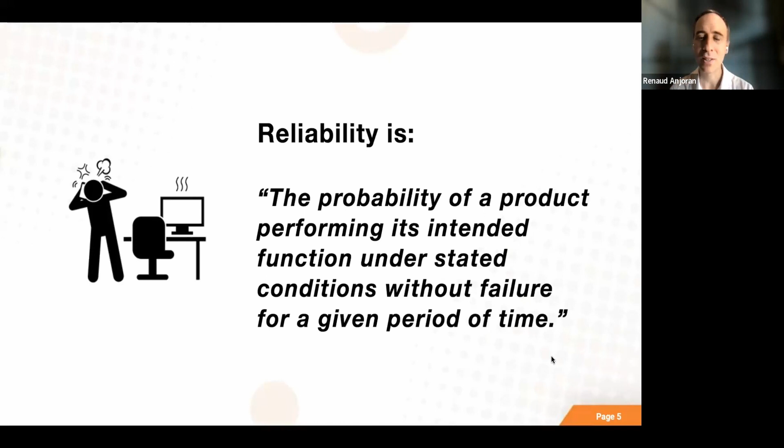Exactly. Okay, so with that out of the way, a lot of people confuse design issues and manufacturing issues, like reliability and quality. So is it fair to say that reliability is really built into the product at the design stage, while product quality really comes from good manufacturing processes?

Yeah, that's correct. Basically, reliability is part of the design, meaning that if the design is not reliable, then basically the whole product is not reliable, regardless of manufacturing. However, when it comes to manufacturing, if there are issues that relate to manufacturing only, then we're talking about manufacturing quality issues. We're not necessarily talking about a design issue.

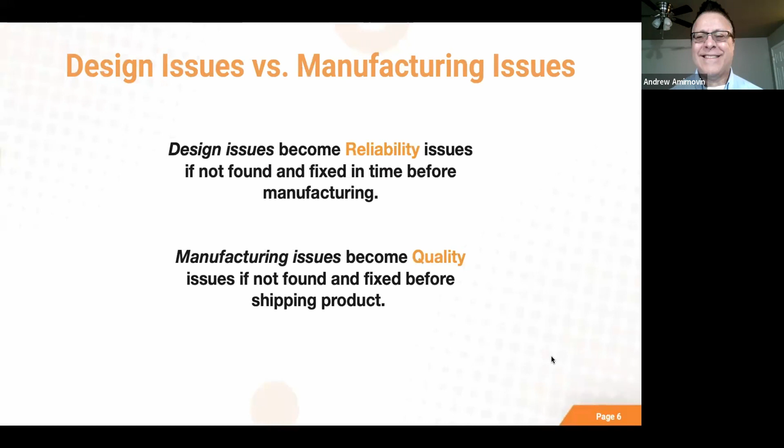Right, of course, it's a bit more complicated than that. What, can manufacturing issues still creep into the product and make it poorly reliable? Maybe, especially right, 1, 2, 3 months after delivery, the early failures—a lot of them are due to manufacturing quality. But this is a nice way of looking at it.

So why is it important to pay more attention to quality pre-launch to save cost post-launch? There's a direct impact on lower cost once the product is on the market. So why is that?

Well, if you are trying to make a reliable product, then you wouldn't have all these issues that we have in the red section. For example, you'll end up having at the least additional inspection issues, trying to figure out how to fix these issues. And then, of course, rework and repair problems, maybe even massive returns and product recalls that need to be dealt with. Loss of sales and revenue impact.

Of course, tarnished brand and marketing image that would definitely hurt. Customer complaints and investigations, high warranty costs. We're talking perhaps even need for excess inventory to cover all those losses and issues. And then at the end of the day, we're talking legal issues, litigations, and lawyer fees. All of these are considered to be some sort of cost, and if you add them up, it'll be a huge cost.

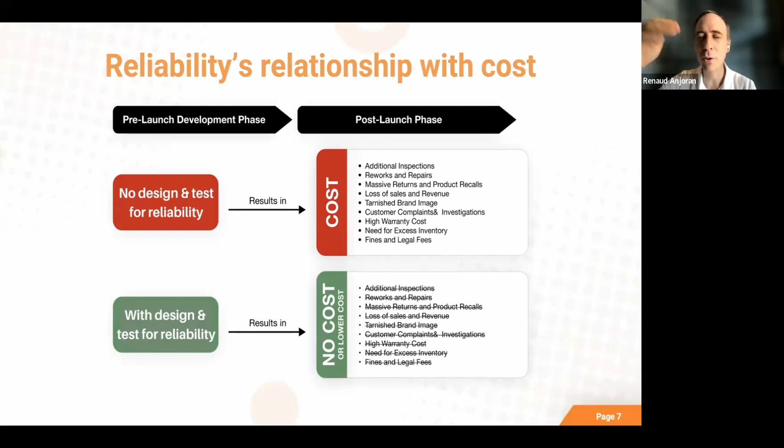So good design for reliability and good testing to catch the issues will prevent most of these costs. That's really why we're doing this webinar. And the higher the volume of production and sale of the product, or the higher the price of the product, the more this is important.

Yep, that's right. Let's look just very quickly at two very dramatic examples of catastrophic reliability failures that cost billions of dollars. One was the Galaxy Note from Samsung a few years ago. And this was really a reliability issue, due to the design of the batteries and the packing around the batteries.

Yeah, it's true. Imagine that just one battery caused so much issues for a huge company like Samsung. If any other company had this problem, they'd be out of business for sure. Maybe Apple or Google might have survived also, but this is not for smaller companies. Correct. Another one was the 737 MAX that has been grounded for years and years, but basically this also is a reliability issue.

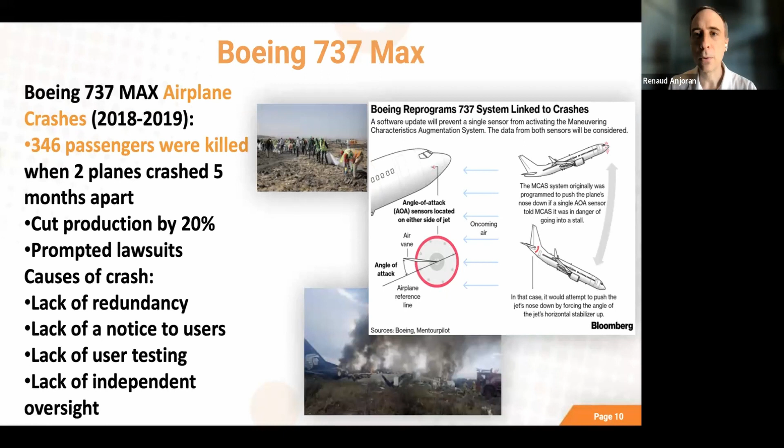Lack of redundancy - they only relied on one angle of attack sensor, not both. They did not tell the pilots about the MCAS software, and did not test how pilots would react. The regulators weren't even aware of it. All of this happened during the design phase - all these catastrophic decisions. So again, billions and billions were suffered by Boeing and their supply chain.

So let's get into the main content of this presentation. We said four topics, right? How to build reliability into the product, and why four topics - what is the logic here?

So you have the NPI phase before manufacturing - the product design, development, and so on - and then it gets transferred into manufacturing. So these are two large topics, and under NPI we're going to cover some topics on the design of the product and on testing.

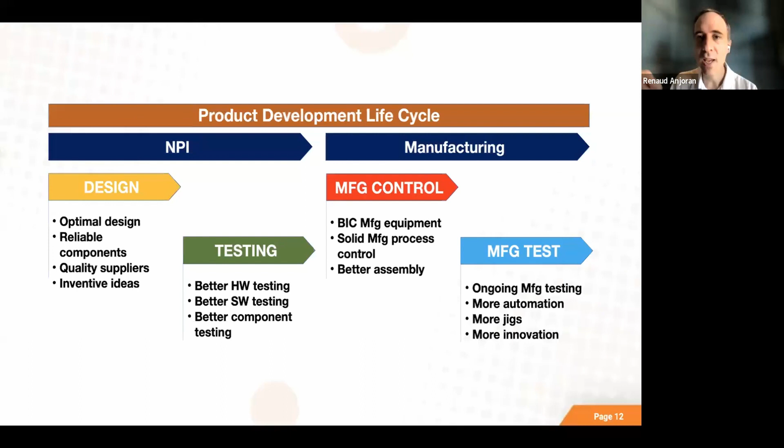A lot of testing is done during design and development to detect design deficiencies, if there are any, and address them. Later on in design and development, testing is more to confirm that there's nothing major. Then you go into manufacturing control, which is very important because it impacts product quality and reliability, and then ongoing tests during manufacturing. So we're going to cover these four topics.

First, design for reliability. Design engineers need to be aware of certain guidelines, some really important considerations to keep in mind.

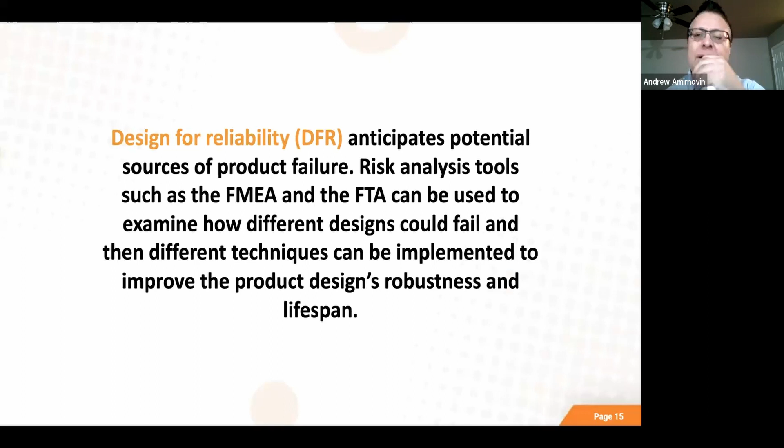So Andrew, what is DFR? Well, DFR stands for Design for Reliability, and really what it means is that you want to take out any kind of risks related to reliability. Some risk analysis tools, such as FMEA, Failure Mode and Effect Analysis, and FTA, Fault Tree Analysis, can be used to do risk analysis ahead of time. But at the end of the day, the next slide will show that there are a lot of other tasks that need to be done in conjunction with the design that will make your product more reliable.

These are some of the tasks we're talking about. For example, understanding how your product will be used is very important so you can design it more reliably towards that goal. Risk analysis, we talked about. Testing at various stages of development and manufacturing to make sure your product specification and reliability goals are being met. And of course, making the product more robust - in terms of better design, better components used, materials, and making failure diagnostics easy.

This helps a lot when you're doing the design - before you even get to manufacturing, you get to see what is failing and what needs to be fixed. And of course, planning for maintenance and repair if needed, and the possibility to replace failed components when you get returns coming in. So in short, these are some of the tasks, but there are probably a lot more best-in-class activities related to design for reliability.

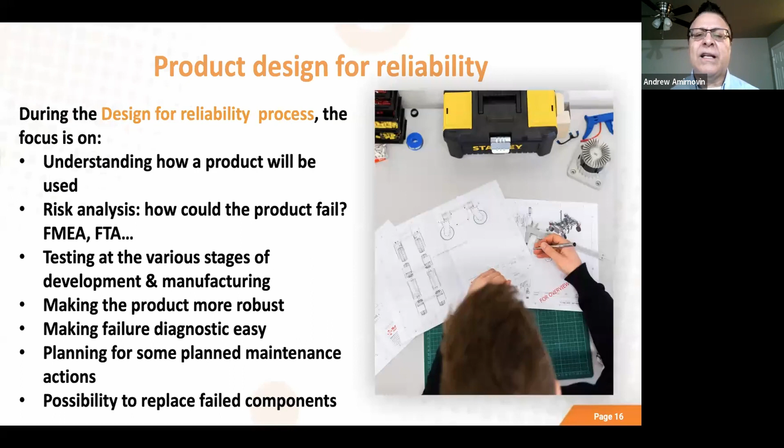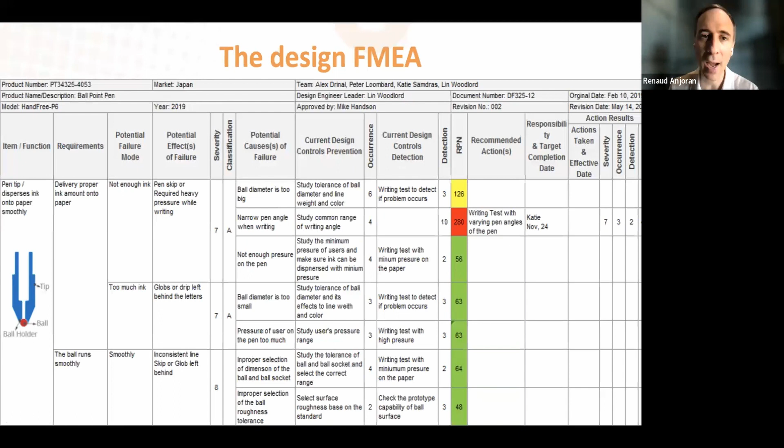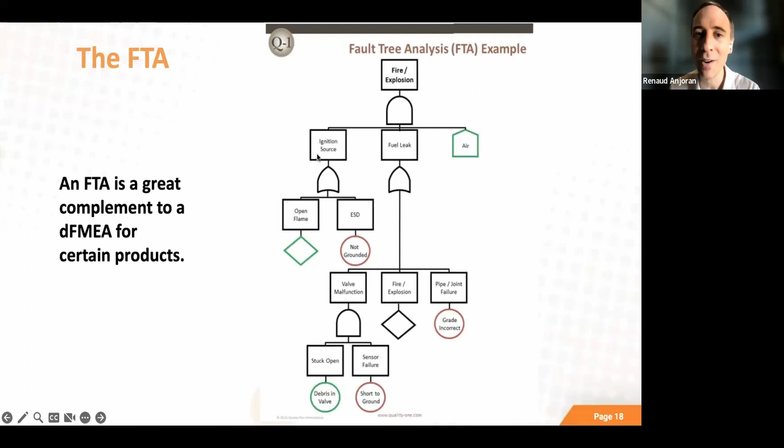Okay, how can we reduce the probability of these situations that will lead to the hazardous situation here, where we have all three, right? Okay, testing now. So this was the design and the analysis and improving the product design.

Now, when we talk about reliability, there's all kinds of testing that we can go through. Basically, this is from the very first phase of the product design and development, all the way to the feasibility study, proof of concept prototype, the prototypes to EVT, and then design validation testing, production validation testing, and then going into mass production. At each of these phases, there are different types of tests that typically make sense. Do you want to run through them quickly so people understand all these acronyms?

Absolutely. I'm glad you mentioned that there are these different phases. In at least in our process, we have phase 1, 2, and 3, and so on: specification phase, feasibility phase, prototyping, tooling, and so forth. At the beginning, on phase 1 and 2, the proof of concept, the product is not durable enough to do any kind of reliability testing, except that you probably want to do functional testing to see if the design is coming along okay.

But once you get into Proto 1 and 2 and so on, the prototype is complete, you probably want to do a really good major design review to make sure that everything is meeting the design goals.

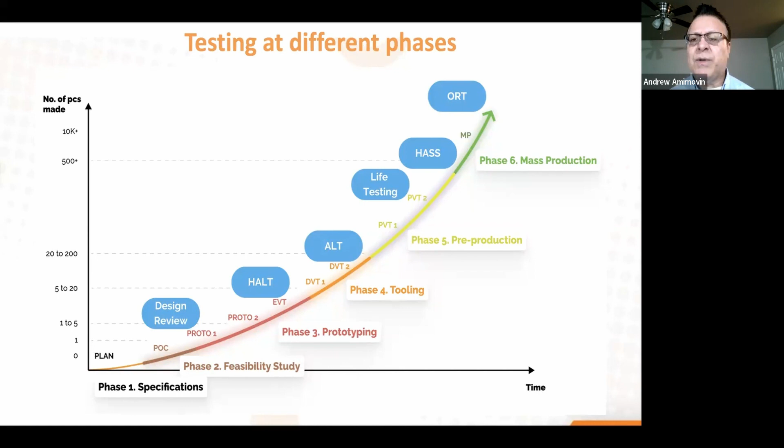Yes, that's exactly right. This does not necessarily apply for every product the same way, because it depends on the size of the product, type of the product. For example, medical product versus a consumer product, big difference. Some products, failures can be disastrous. For others, it's really not the case.

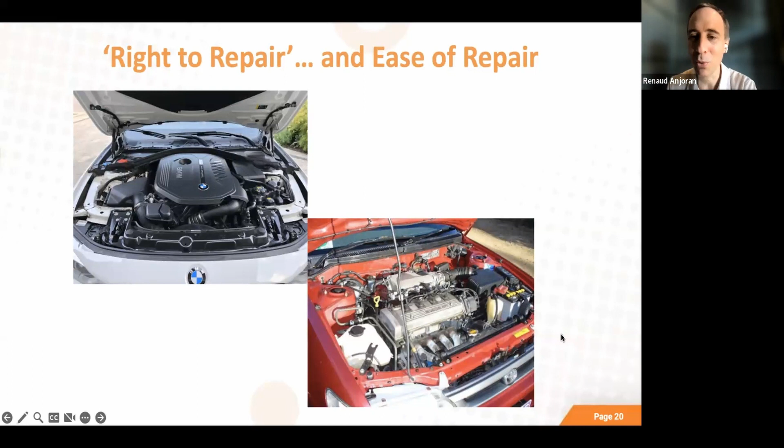Earlier we mentioned how easy is it to fix, to replace components, to do maintenance, and so on. This is a fun photo. This is a BMW, you need to bring it to the garage to do pretty much anything, versus this old Toyota model where you have everything easy to access. This is really a pleasure for people who like to do little fixes by themselves.

Design for quality is also very important, because quality issues will impact reliability. If it prevents the product from actually functioning, that's a big problem. So it's usually done at the same time as design for manufacturing, design for assembly.

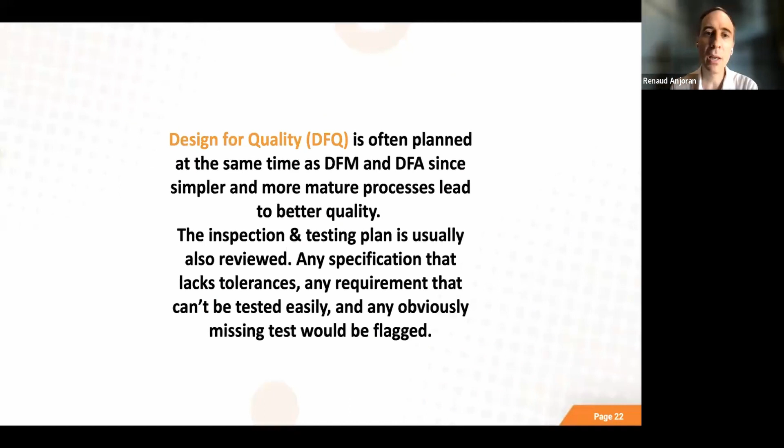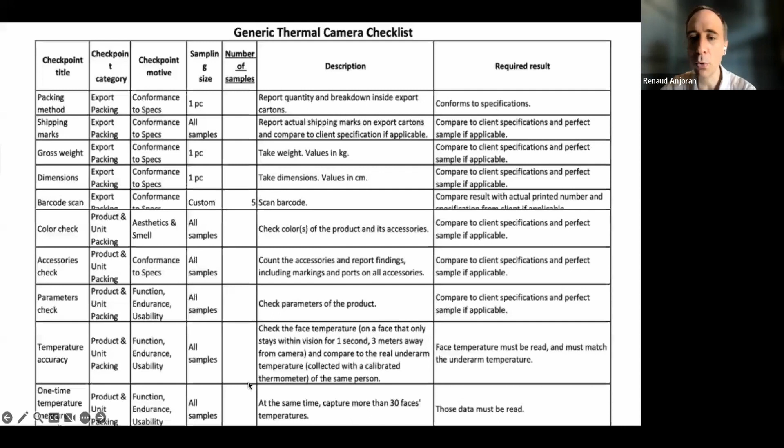I'm not going to go through this in much detail, I think a lot of people are already familiar with that. Preparing a checklist, knowing, okay, this product, for example a camera, how exactly is it going to be checked? What are the important tests to be done during production, at the end of production, and so on, so that everybody's on the same page, building a standard.

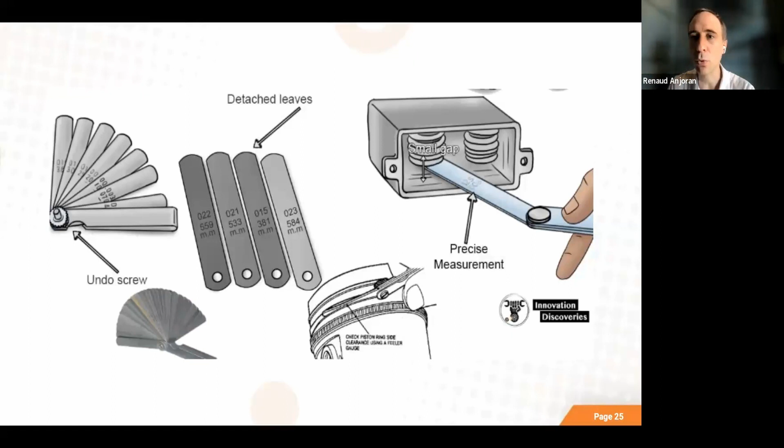Especially if it's supposed to be dust proof or waterproof and so on. There are usually ways to test, and sometimes a custom gauge has to be developed. But if you start to look at it from the angle of reliability of the product, can a failure here on the quality side actually lead to a failure of the functions of the product? If yes, then it's very important to spend the time to do it right.

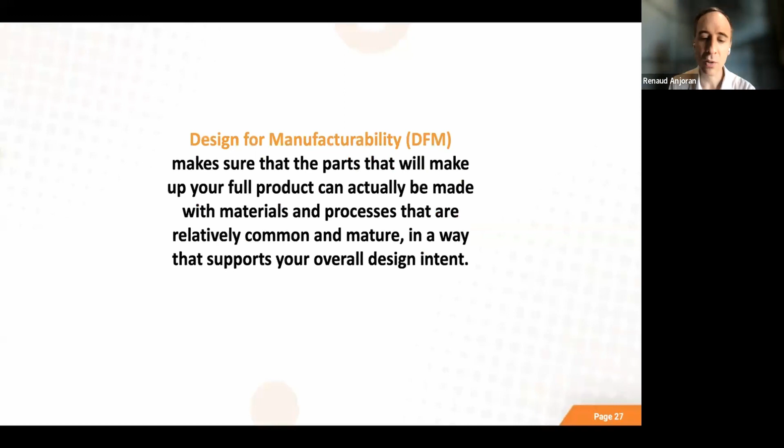Finally, DFM, design for manufacturability, very important. If the product design requires manufacturing processes that are not very mature or common, or the use of certain components that usually aren't assembled or treated in a certain way, there's a high chance things will go wrong because the manufacturing itself is not mature. We're talking about design for manufacturing, also for assembly. Anything that simplifies is good because it will reduce the opportunities for mistakes.

This book here about DFMA is a very popular textbook, it's got a lot of examples. This is just one simple example about cantilever snap fit.

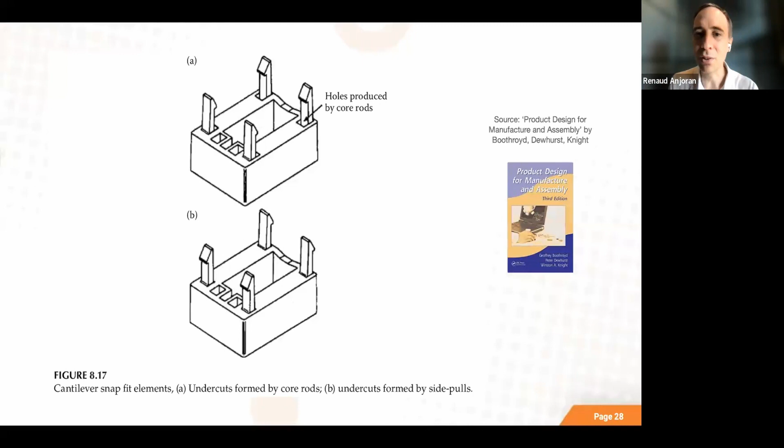When you assemble, you put it together, then have to screw it, and the screws over time can get unscrewed slowly, or they might not be at the right torque, and then you can have a lot of issues. Now, if it can be simplified like this, it just snaps together, and that's it, and the operator actually hears the click. That's the best, when it actually makes sense.

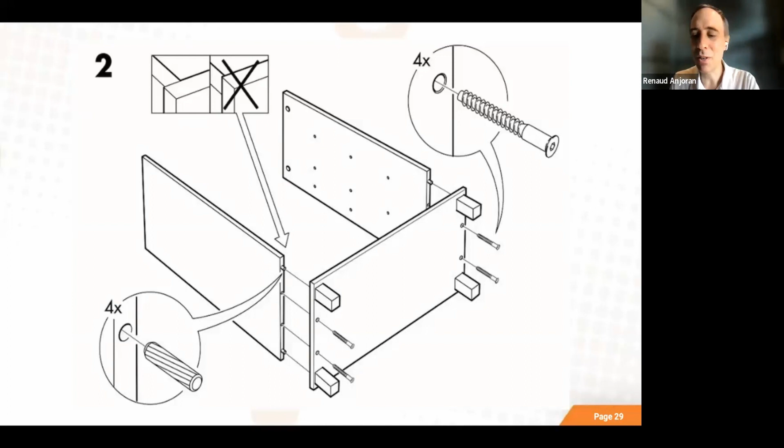Very simple work instructions and also simple assembly process. This is from IKEA, I guess most people would have recognized that. This is something we like to use as an example also for manufacturing, because if you can simplify and make some very simple work instructions, well, all the best.

And this is part of manufacturing control. Manufacturing control is a very deep topic. Do you want to pick two or three of these topics, Andrew, and explain a little bit what we mean by manufacturing control?

Yeah, sure. I think that one of the most important things in manufacturing control is the control plan. You have to have a plan, you have to have a way of keeping everything under control, and it's basically a process that says we're going to be doing what during the process, and how.

And yeah, a control plan looks like this typically. This is an example, and it's very detailed.

It tells you each process, for example, process name, machine that is being used in that area, and then products and the process and materials, and maybe even there are some instructions on how you evaluate whether or not it's working, how many pieces you need to pick for inspection during the process. It's a very detailed process, and I think for any kind of complicated manufacturing process, this is critical.

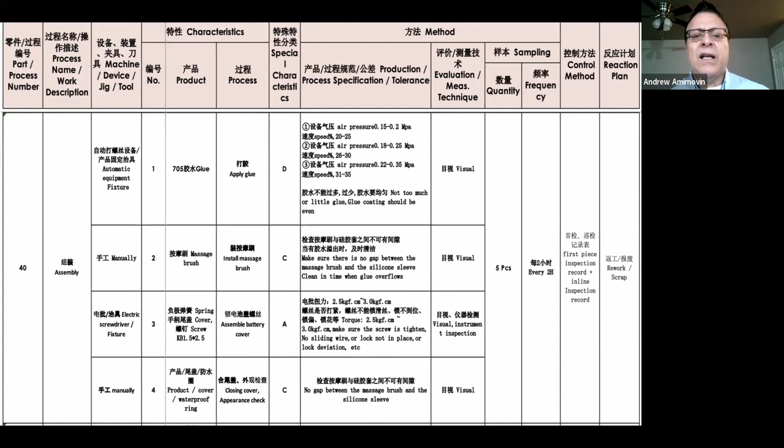And of course, during the assembly process, mistake proofing is critical. You have an assembler that comes to work not in a good mood, and what if they start assembling the wrong way, different than the person before or after? So it's very important to have a process in place where an operator couldn't really affect the reliability or quality of the process.

All operators need to be trained ahead of time so they know what they need to do. It's very important to have automation, or more automation if possible, and create jigs to keep the process more consistent. And of course, creating standard operating procedures so everyone in the assembly line knows exactly how they're supposed to follow the procedure, standard for everybody.

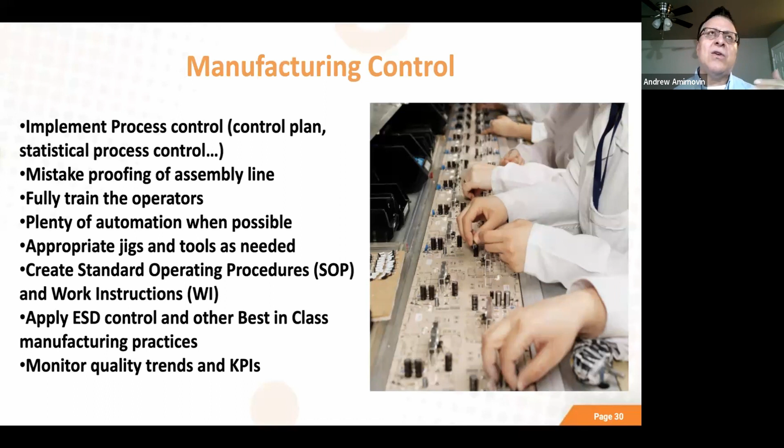Work instructions are critical. And then, in electronic manufacturing, ESD control and having ESD clothing for all the operators, and all the tables being in ESD control, is very, very important. And at the end of the day, all the KPIs from quality need to be monitored so you can see how your manufacturing and production is actually running.

Right. And then we also mentioned testing during manufacturing. Yeah, we mentioned PVT, right? Production validation testing or pilot, which includes pilot runs, qualifying the materials properly with incoming quality control, some specific tests on the PCBA, and then as you get the assembly done, first article inspection, then ongoing patrolling, sort of in-process quality control, and then outgoing, batch by batch, and in parallel, picking a few samples for ongoing reliability testing.

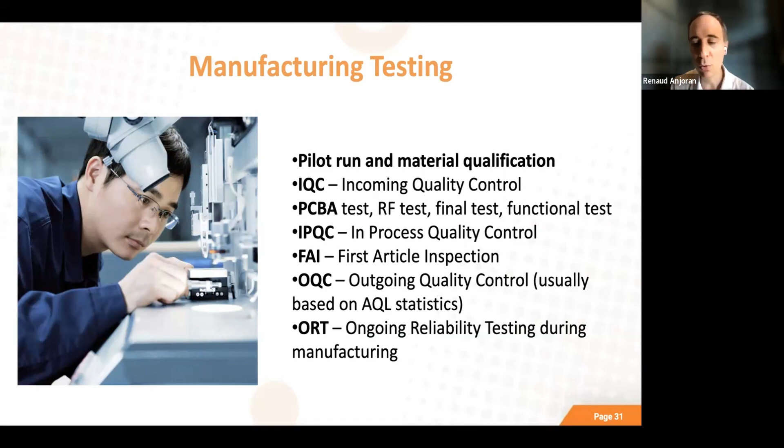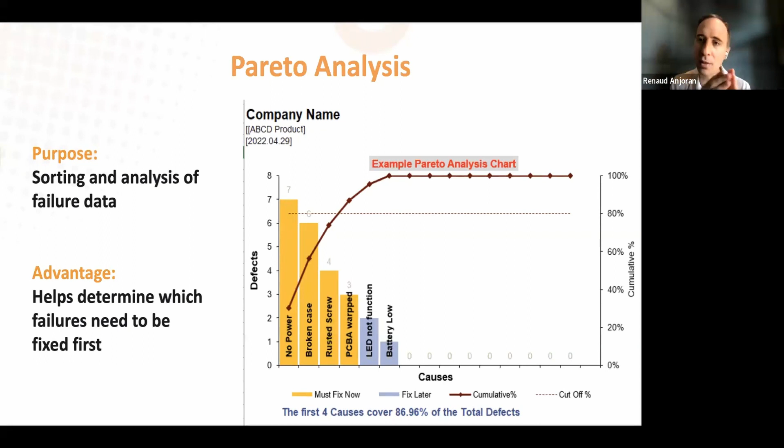But if we just look at the quality reliability side, you need to prioritize, and typically in this type of analysis you arrange them by order of frequency. So you attack first the ones that amount to maybe 80% of the failures, and over time that's how you get the most bang for your buck in your remediation actions.

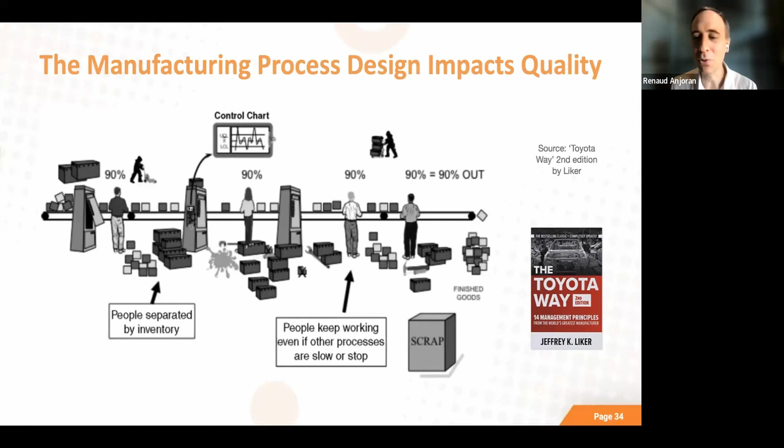You have a lot of inventory, so this is probably not one piece flow. The operators can forget, did I do it on this one? Or did I do it twice, I'm not sure now. It's a bit of a mess in the layout. They keep working even if other processes are slow or stopping, so it builds even more inventory, and sometimes it needs to be reworked. All of this is really an insult to manufacturing process quality. You really need to avoid this.

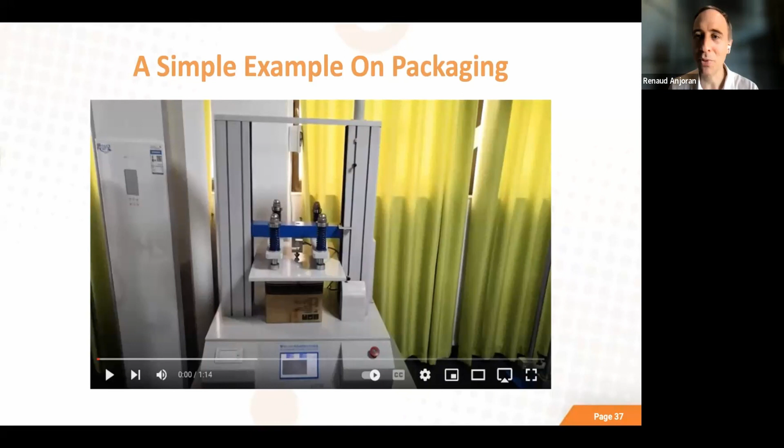One thing very important for people to understand is that some of these are very common. For example, the product has buttons and you want to click the button a certain number of times to see if after a while it stops clicking properly or feels different - that's an example that makes sense across a very wide range of products. But then there's a lot of very product-specific tests. Maybe you can give a couple of examples so people understand.

I think you've got sometimes very simple products where it's very easy to understand the use case. Someone is going to probably drop an iPhone, so it's easy to understand what we can do so that the glass doesn't break. But in some cases it's not so easy because it's a brand new product, a brand new company, cutting edge, never used before. The use case is not clear, and when it's not clear, it's very difficult for designers or reliability engineers to design a test that can actually test this situation.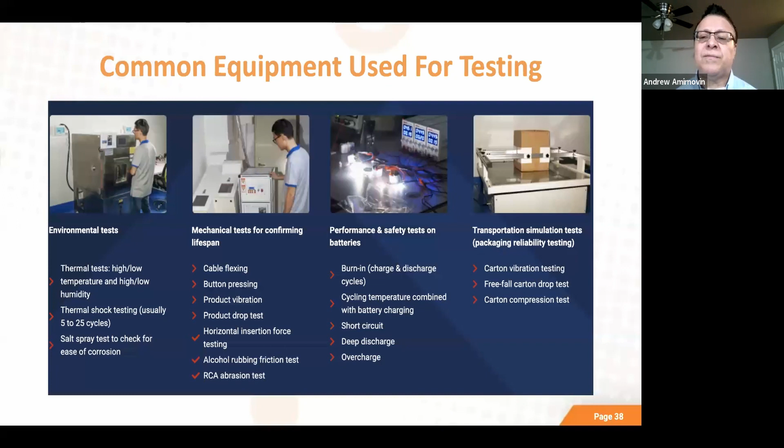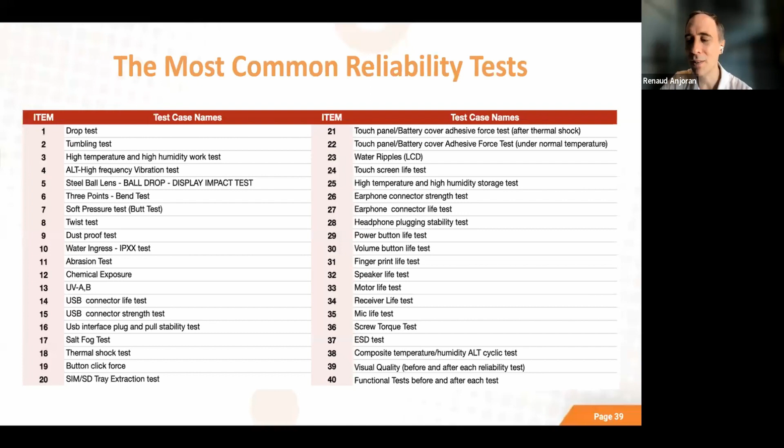This is another way to show it. Very common tests, but again, has to be customized to the product. For a car, for example, they will have a special test station to open the door and slam it 5,000 times, to see how it closes and feels after that, or if the hinge drops — if it can withstand the stresses that can be reasonably forecast.

And then in some cases there's a custom protocol that makes sense specifically for that product. The ALT, vibration, USB contact test, connected test, and life test, and button press — all of these are pretty much customized tests with respect to the use case of that product. For example, in the ALT we need to understand the high temperature, low temperature, and how many cycles we need to run this product, based on the use case and the warranty limit and so forth. All of these need to be customized — if not, you're not going to get the results you're looking for.